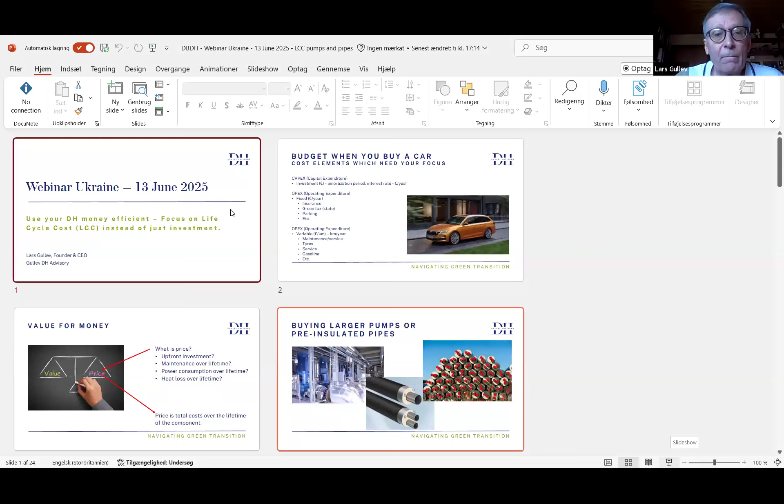Thank you very much for the invitation to this webinar, giving me the possibility to focus on what's important when you are in a situation to make new investments. I'll give you a picture of how we, in Denmark, in the company where I worked before, VEKS District Heating Company, responsible for district heating supply to the western part of Copenhagen, make decisions to invest in larger components like pumps, pre-insulated pipes, and boiler installations. So, use your district heating money efficiently. That's the title of this presentation, with focus on life cycle cost instead of just the upfront investments.

When you buy a car, you need money to give to the car dealer for buying the car. So you have CAPEX, capital expenditures. That means the investment you have in the car now, and this investment you have to depreciate over a period of some years, 6, 7, 8, 10 years. You have to take into account the interest rate. With these figures, the investment, the depreciation period, and the interest rate, you can calculate how many euros per year you need to budget for financing this car.

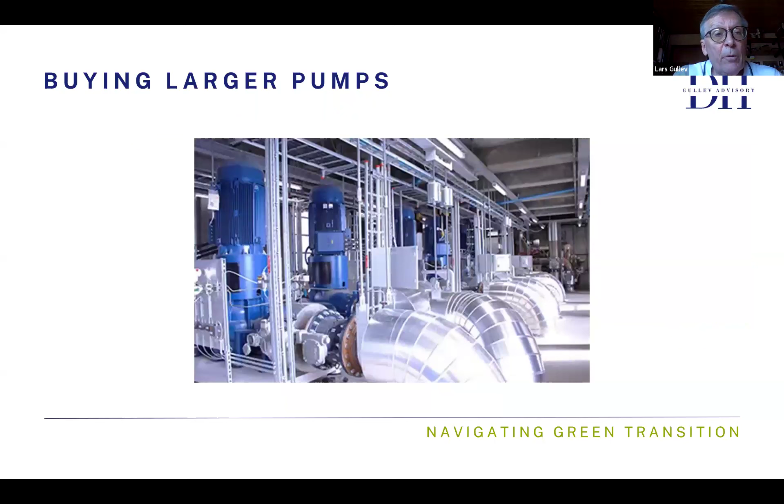If we start with the pumps, it's very important to focus on the necessity for the pump system to last for many years. For this, it's necessary to have reliable operation of the pumps, and therefore it's essential that you are very critical when you design the pump correctly from the start. If you have a poorly designed pump system, it will generate decades of high maintenance and poor reliability for the operators of the pump.

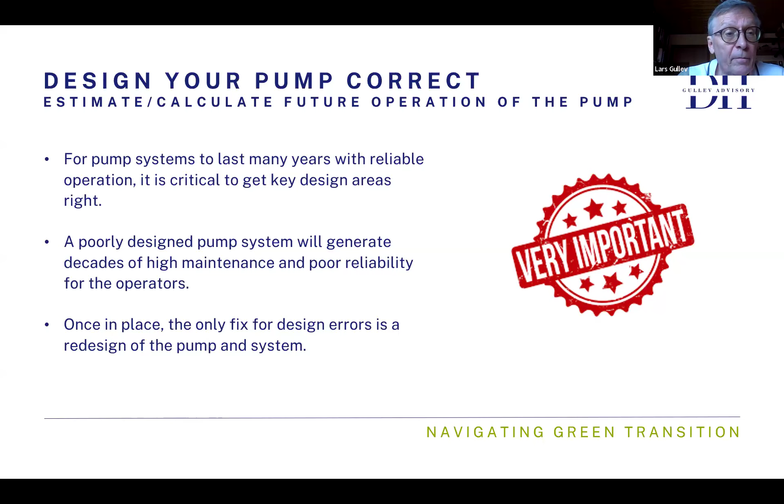But the most important point is that if you have designed a pump wrong and placed it in your system, the only way to fix that problem is to redesign the pump and the system, and that's a very expensive decision to make. When we look at how to design a pump correctly, it's necessary to go into details and try to estimate how the pump will be operated in your district heating system.

The situation could be that heat demand will increase over the years, so you have to take that into account when you design your pump, designing it for a larger flow in the coming years. It's also important to focus on whether you're installing a pump you could operate both summer and winter, or specific pumps for winter production of district heating and summer production of district heating.

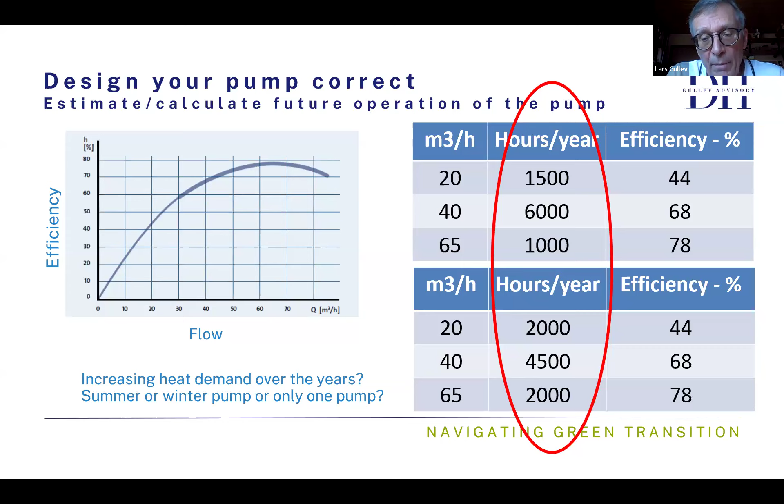I've tried to show on the slide that you have different demands for heat, and the amount of operation hours per year could be very different from one situation to another. That, together with the efficiency of the pump at different working points, means it's important that you design your pump correctly, taking into account how many hours per year it will operate in specific working points. If you don't make that calculation, it's more or less gambling whether you'll have success with the pump or not.

When you have bought the pump and put it into operation, the cost for having the pump is shown on this slide. It's just an example, and I've put in the source so you can find the figure on the internet. This is a picture of the total pumping costs, which can be estimated at $600 per kilowatt per year of power.

Of which up to 70% is electricity consumption. You can see for the smaller pumps, the percentage share of cost related to electricity consumption is smaller, but the total costs are larger. If we have a pump of 5,000 kilowatts or 5 megawatts, the primary cost for operating the pump is electricity cost, and that covers totally 85% of the annual cost. So it's evident that if you haven't designed your pump correctly, you will lose a lot of money because 85% of the total cost is related to the operation of the pump.

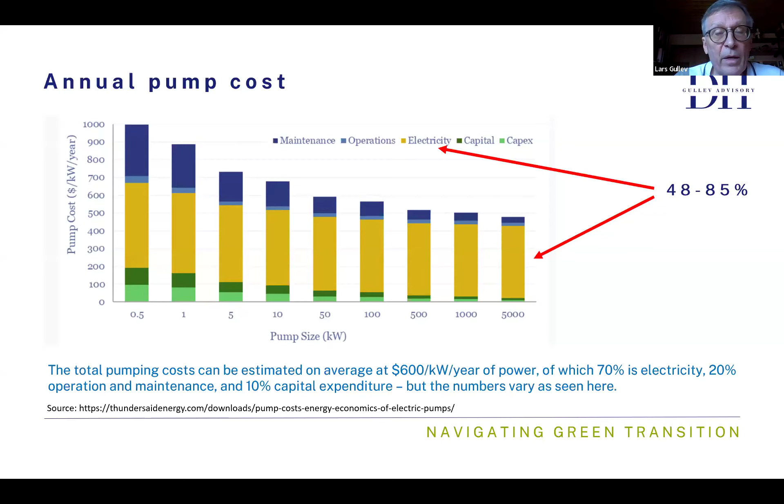There's a difference from around 50% for the smaller pumps up to 85% for the larger pumps. That's just to ensure you have that in mind when looking at the cost for having a pump.

When we call for tender for larger pumps, we give the supplier information about the head we need for the pump, the amount of meter water column it could operate with, and the flow. But we also focus on the efficiency of the pump. We put into the tender specific working points where we ask about the efficiency for the pump working in this operation point.

We also require in the tender that the efficiency of the pump at these specific operation points has to be confirmed during operation. That means after the pump has been in operation for some months, we measure the efficiency at these specific working points. If this criteria from the tender is not fulfilled, there will be a penalty for the supplier of the pump.

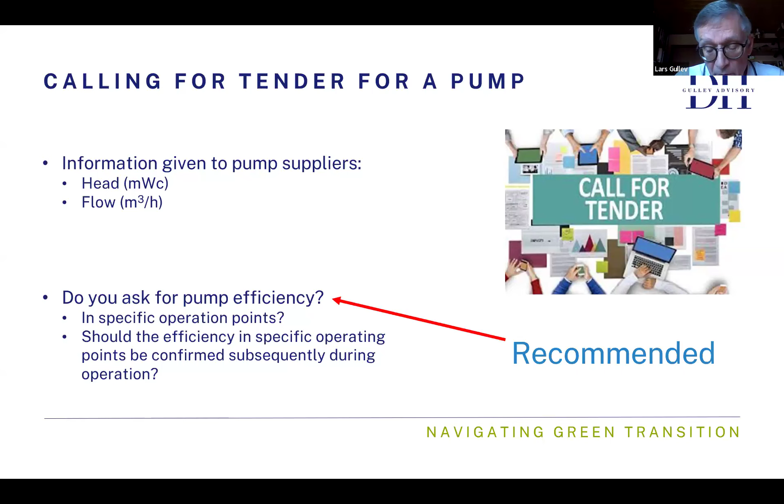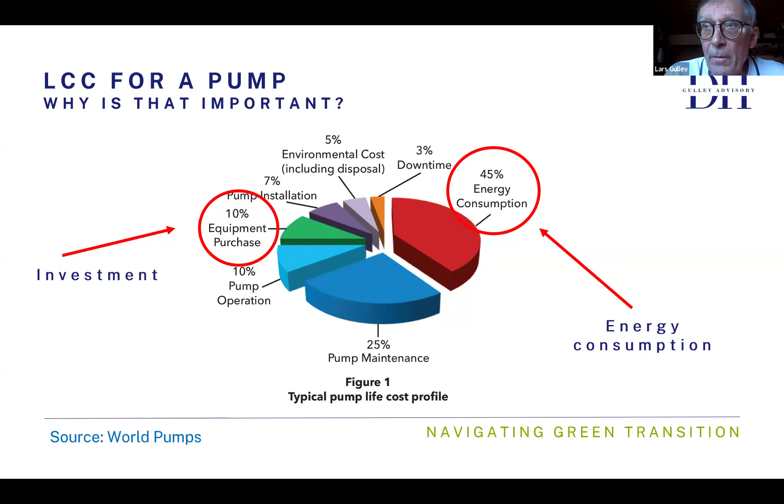So this picture shows it can be very expensive for you if you save a little money when you buy the pump, if the consequence is that electricity consumption during the lifetime of the pump is much larger. So it can be very expensive to try to save money when making the primary investment in the pump.

When I talked about these efficiency curves and efficiency of the pumps, it's necessary when you get your tenders that you compare the different products from different producers of pumps, because the efficiency in specific operation points defined by you can differ from one producer to another.

That depends on how the curve for your flow in the system will look. Maybe here pump A is the best, maybe it's pump B. I can't tell you here because it depends on your actual operation situation and your system. But you have to look at these figures from the different potential suppliers of the pump to your system.

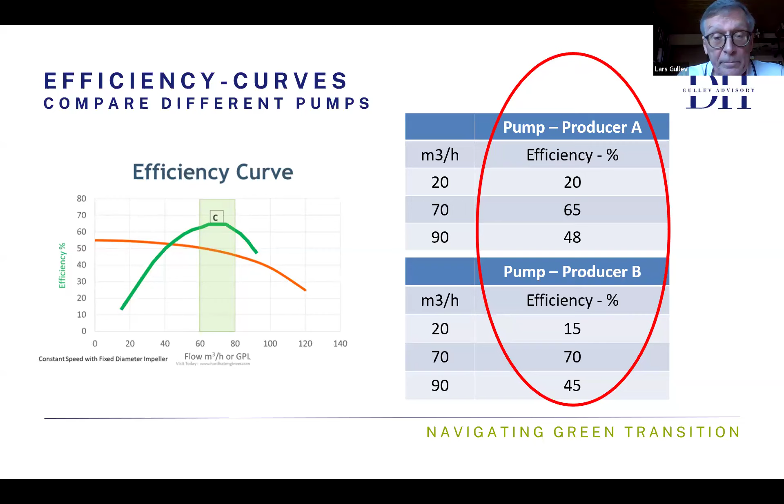Focus also on what we call the BEP, the best efficiency point. That's the point where you have the lowest energy consumption in the pump, or the best efficiency. And you have also to compare that from the different offers you get from the different producers.

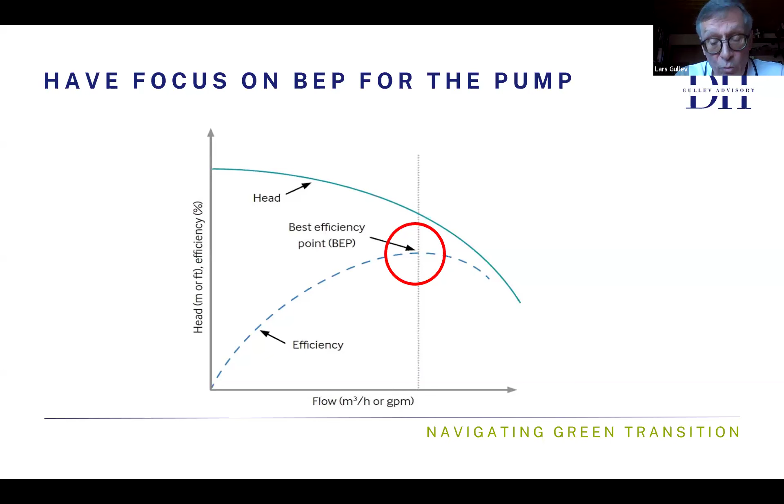When I focus on this life cycle cost, LCC, it's a concept which refers to the total cost of a product or service over its lifetime. When you look at that, you can be sure that you take into account both the upfront investments, the operation cost, the maintenance and repair cost, and how to get rid of the product again. Then you can compare products from different producers in a fair way, because it gives a picture where you can compare one product to another.

Furthermore, this life cycle cost analysis can help you to minimize your total cost and by that maximize your energy efficiency for many types of systems, including pumping systems, district heating pipe systems, and boilers.

So it's more or less the same method you use when you compare different cash flows from different projects, where you use the net present value way to calculate which product is most favorable.

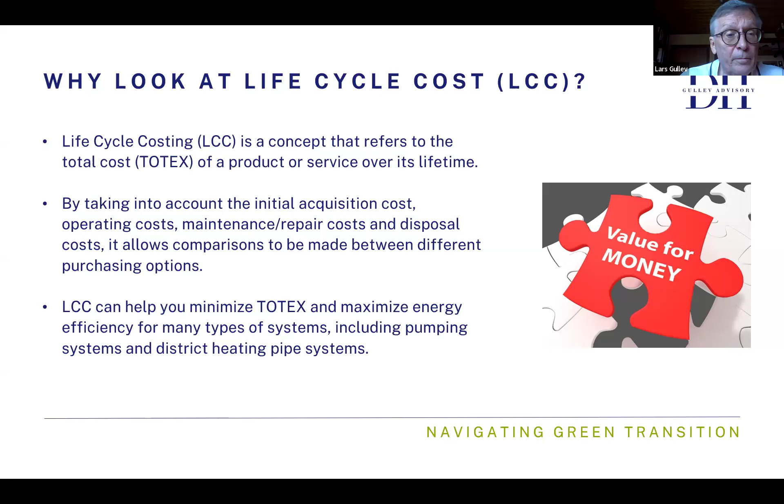So my recommendation for the content of your tender documents is, of course, you ask for the price of the pump. If possible, you could also ask for the price of a maintenance agreement if you are interested in such one, and if it's offered by the suppliers of the pump.

Then you ask for the pump efficiency at specific operation points, and you inform that it's necessary that this efficiency at specific operation points is demonstrated and verified after the commissioning of the pump.

And then you try to calculate how you should be compensated if the required efficiency of the pump cannot be demonstrated or cannot be verified. So the correct design and high efficiency of the pump at the normal operation points are much more important than the here-and-now investment in the pump.

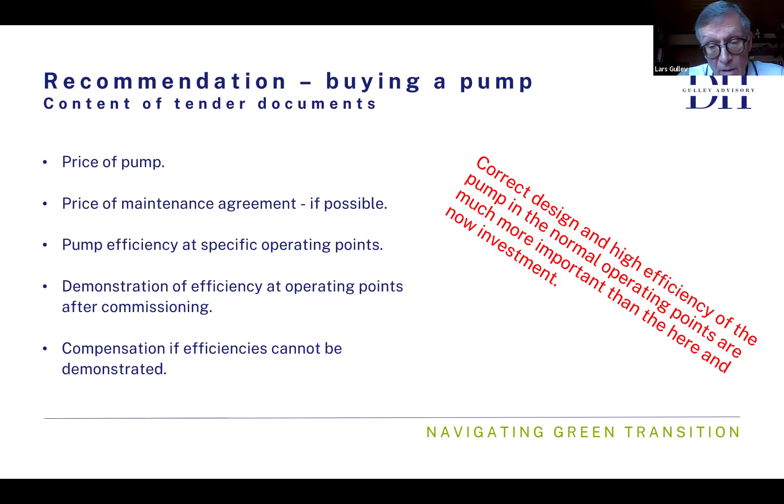Then we jump to the pre-insulated pipes. I don't know if it's easier to make the same calculations here, because there are more parameters you have to take into account.

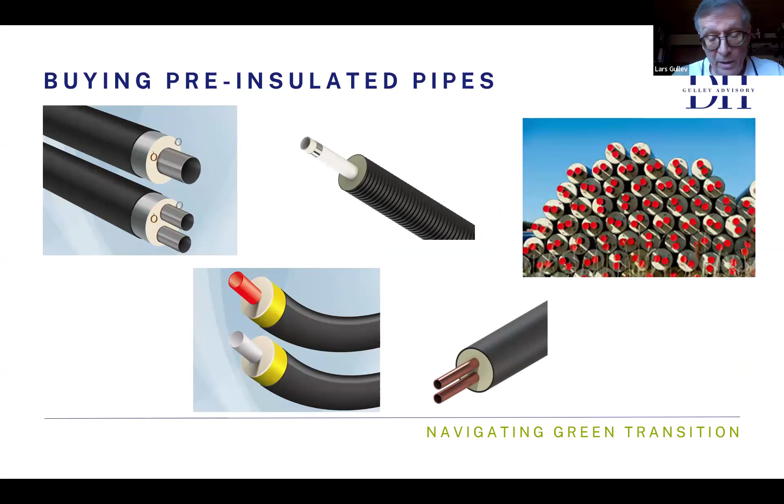You can buy the pre-insulated pipes in different series, series 1, 2, or 3, and the series number reflects the thickness of the insulation. That means that a series 2 pipe is better insulated than a series 1, and series 3 is better than series 2.

I have just put a red circle around some of the figures, so you can see for this dimension of 300 millimeters, a series 1, the heat losses are around 41 watts per meter; series 2, 33 watts per meter; and series 3, 27 watts per meter. So decreasing heat losses if you go from series 1 to 2 or to 3.

So you will save money in your operation phase by having lower heat losses, but at the same time you increase your investment now, because it's more expensive to buy series 2 compared to series 1, and series 3 compared to series 2. So here again, you can reduce your operation costs by increasing your capital costs. What to do depends on different figures I'll come back to.

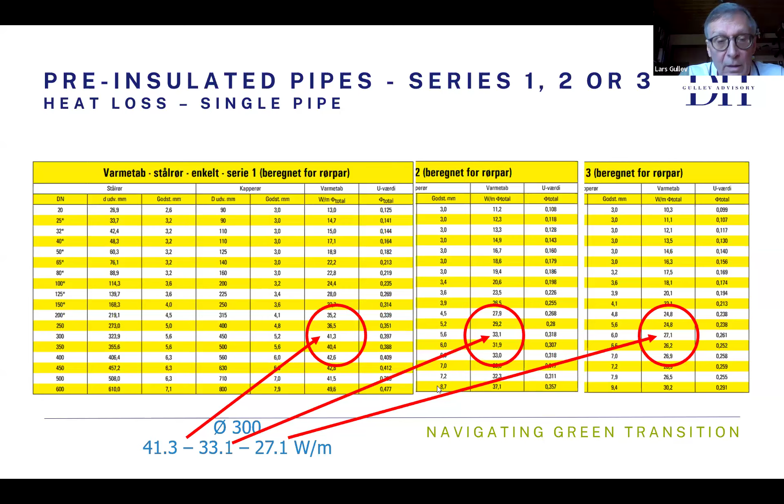You also have to decide if you will buy this pre-insulated pipe as a single pipe or a twin pipe. This is just an example for series 1. A single pipe has one pipe for flow and one for return. In a twin pipe, you have flow and return pipe in the same outer casing.

Here again you can see that if you choose the conventional way with two separate pipes, the heat loss for a 125 diameter pipe is 28 watts per meter, and it's almost half if you choose a twin pipe. So here again you can reduce your operation cost by investing more money when you're buying the pipes.

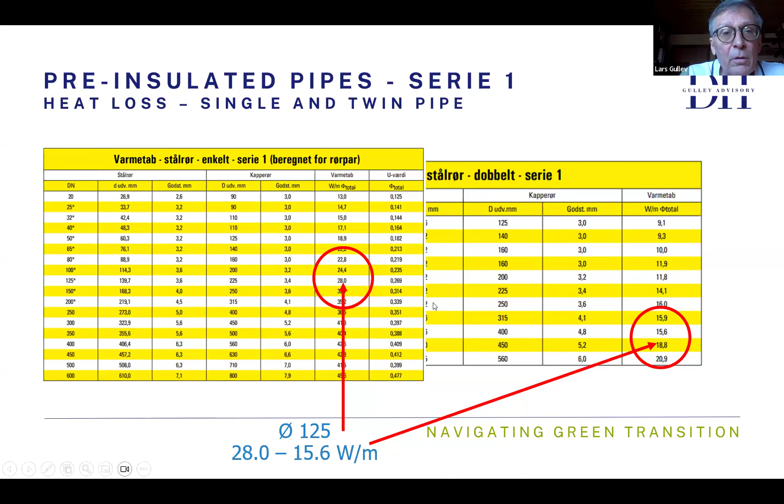What to do depends on what's the cost for the heat you send through your pipe system over the lifetime of the pipes. So the elements you have to take into account when you design your pipe system for minimizing the life cycle cost: do you want to choose a single pipe system or a double pipe system, and then you have to decide which series you want—1, 2, or 3.

When you have made this decision, or before you make it, you also have to take into account that it could be more expensive to construct the pipe system with two single pipes compared to a double pipe, because you have to make a wider ditch for the pipes.

Then you have the maintenance cost over the lifetime. You have to look at the maintenance cost for single pipes or double pipes. With single pipes, you have double the amount of joints, which could be necessary to maintain over the lifetime of the pipe system. You have fewer joints when operating with a double pipe system or twin pipe system.

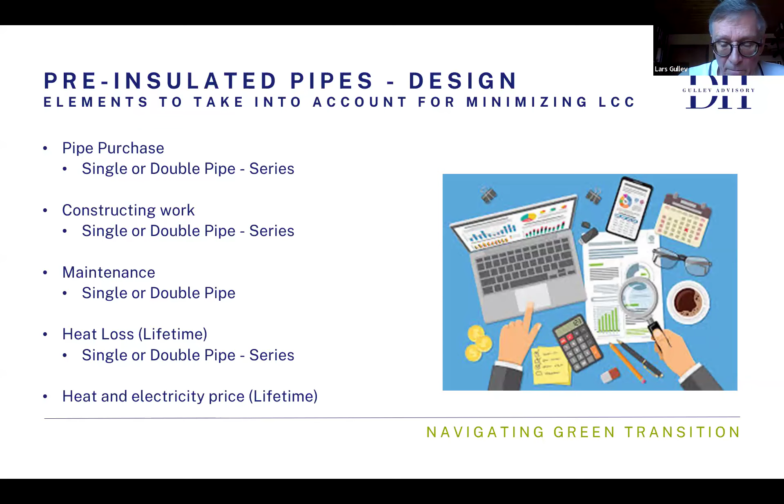A very important element when we look at the operation costs for this pipe system is the price for electricity and the price for the heat you will send through the pipe system. So you have to estimate how the price for the heat you buy and put into the system will develop over the next 20 years, for instance. It's not easy, but there is some help you can get.

The elements to take into account for minimizing the life cycle cost, as mentioned, are which insulation series you should choose, and whether it should be single or twin pipes. There are a lot of parameters here, so where can you find help?

There are some free tools on the internet from the producers of pre-insulated pipes where you can get help. There's one from the company Logstor, and you can just Google Logstor calculator. There you will find a free tool where you can put in your specific parameters for heat price, electricity price, and then see the consequences if you choose single pipe or double pipe, insulation series 1 or 2 or 3.

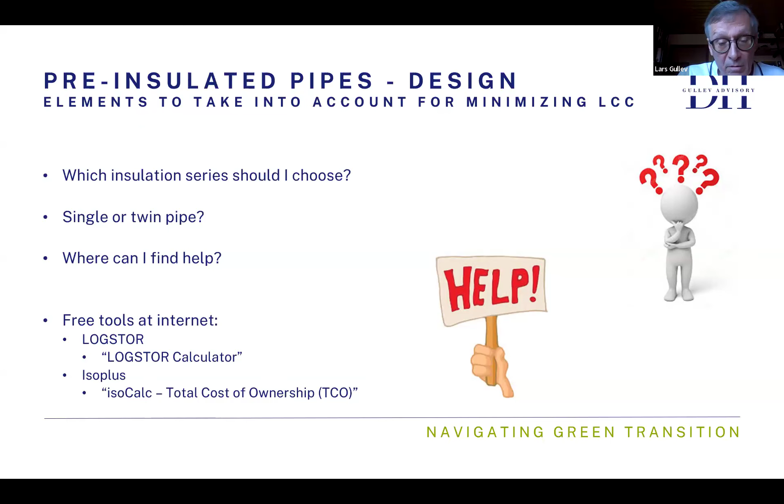And the same if you go to the ISOPlus website. There you can Google ISOCalc, and there you also have a free software tool you can use, the total cost of ownership. So it sounds complicated with these pipes, but there's good help you can get access to free on the internet.

When we then jump to a boiler, the boiler tender document should include, at least if I was responsible for it, the capacity of the boiler in megawatts, and also ask which kinds of biomass can be used in this boiler, or which kind of biomass you want to use, and also ask about the moisture content in the fuel - ask that question to the supplier of the boiler.

When I mention this type of biomass, the background is that it's probably necessary for you to have flexibility between different types of biomass. The situation on the biomass market can change over the next 20 years, meaning that right now you might use wood chips or straw.

Or maybe you will use products from sunflowers. But in the next 5 or 10 or 15 years, it could be other sorts of biomass which you wanted to use, and it is necessary that the boiler you have bought can also operate with these kinds of fuels. Then it's necessary to put focus on the efficiency.

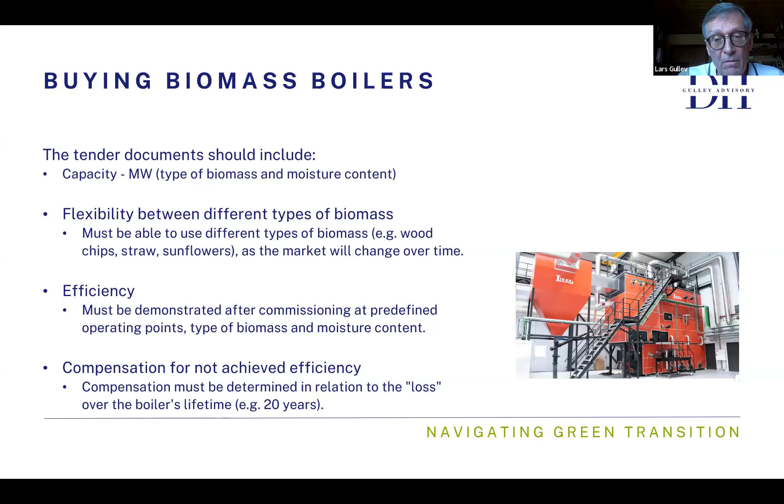To summarize, when buying a pump, the investment in the pump can be 5 to 10% of the total life cycle cost. The operation cost can be up to 85% of the total life cycle cost. That means the efficiency in the specific operation points for the pump is essential for the total economy in your district heating system. Therefore, it's relevant that you have a high focus on correct design and efficiency of the pump at relevant operation points, much more relevant than just putting focus on upfront investments in the pump.

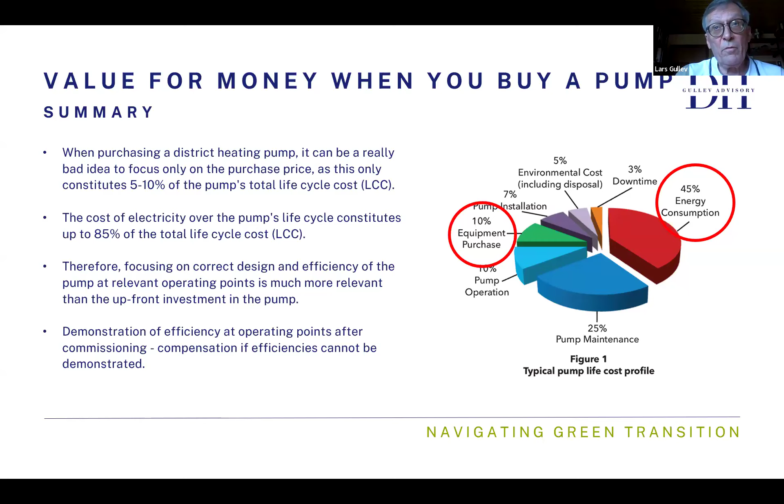And then again, the demonstration of the efficiency at the operation points after the commissioning, and a compensation if this efficiency cannot be demonstrated.

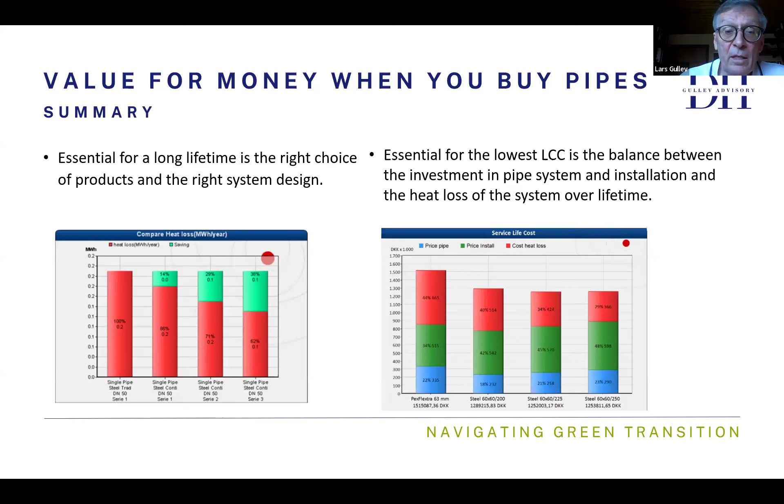For the pipes, it's essential for a long lifetime that you choose the right product from the beginning. That means you have focus on the heat losses in the system, and focus on the cost for the heat you put into the system over the lifetime of the system. It's essential for the lowest life cycle cost that there's a balance between investments in the pipe system and installations, and the heat losses of the systems over lifetime.

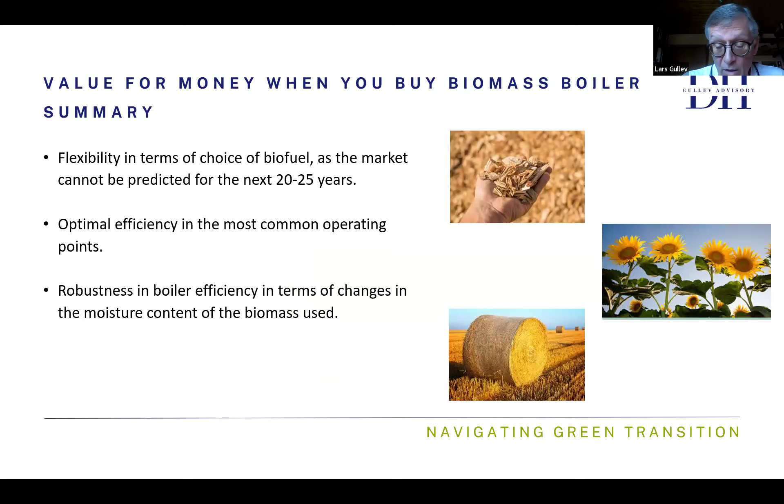So for the biomass boiler, flexibility in terms of choice of fuel is important, because the market cannot be predicted for the next 20 to 25 years, and optimal efficiency in the most common operation points, and then robustness in boiler efficiency in terms of change in the moisture contents of the biomass used. So that was a very quick introduction to life cycle costs. Thank you very much.

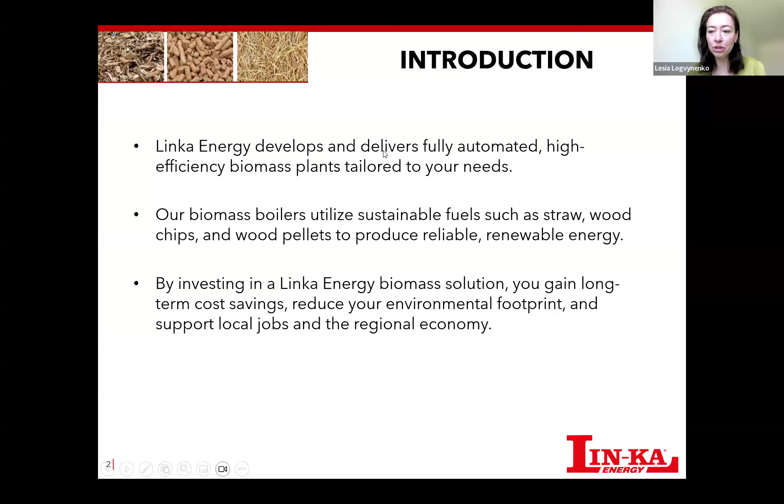Oh, I'm here. Just need to unmute. Thank you for having me here. I'm very pleased to see so many, but it just shows the need for and the interest for all this that we have to supply.

I'm gonna tell a little about biomass boilers. Lars made a good presentation about some of the important things to ask for in the tender materials, and he's completely right in what he's saying. We have made biomass boilers for the last almost 50 years, and we know how to do it. We are very good at burning straw, which is quite difficult, and some of the fuel that you have a lot of in Ukraine. So I think that's why we have such big focus on the country right now.

Our boilers, our quality, and everything else. And as Lars mentioned, it's important to look into these things. You can easily buy a cheap boiler, but then it probably lasts 5 to 8 years if you burn straw. So it's important to look at the quality when you buy things like this, that you buy something that can last the 20 years or more. Otherwise, it can be a very expensive decision to do.

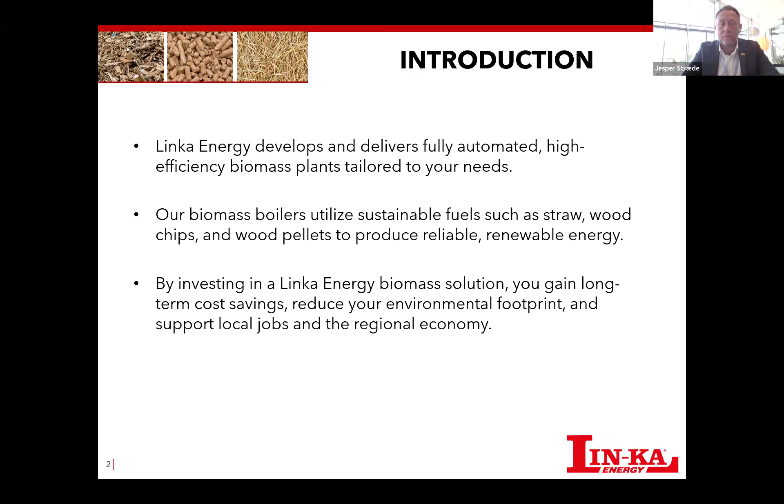Biomass is a lot of things. When I talk about biomass and when I talk to people around the world about biomass, then they always think that it's only wood chips, and that's not the case. We can burn all kinds of biomass, and I'll come back to that later. But biomass in essence is a matter of taking something that contains CO2 and getting something out of the CO2. So if you leave wood chips in the forest, then it will let out the CO2 that it gathered when it grew. So why not harvest the CO2 to do something? You can actually also collect the CO2 afterwards, but it makes sense to use the CO2 that's there already. If you use gas, for example, then you take up something that's in the ground, the CO2 is in the gas in the ground, and you take it up and you burn it and you let out CO2.

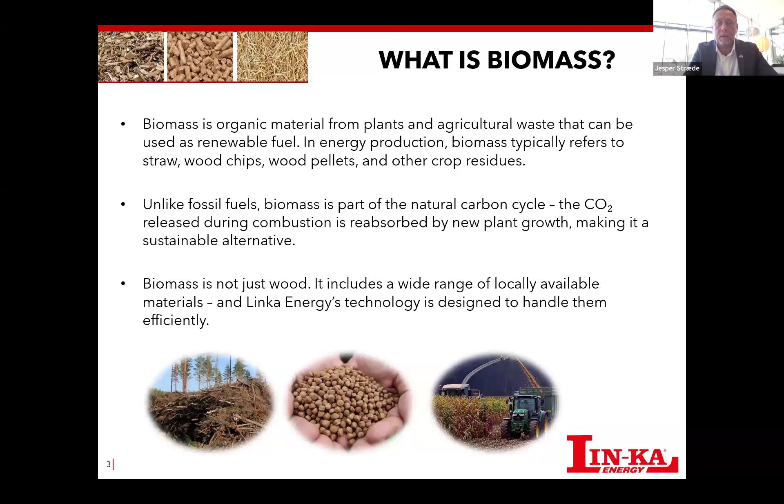That's not very green. Biomass is using CO2 that's already there and will be let out into the atmosphere if you don't either pick it up by burning it or using it in biogas, for example. Again, compared to some of the other things there are on the market when it comes to biomass, it's an easy way to pick a good heat source.

There is biomass all around us. It's just a matter of finding the right one. But when you use biomass, the benefit is that you have energy no matter how the weather is. If you use wind or solar, which is a very good solution, then you are depending on the weather. And I know that the weather can change in Ukraine as well as it can in the rest of the world, especially here in Denmark. We have a lot of windmills and a lot of solar panels, but we also have a lot of days where it's completely gray and cloudy and no wind, and then we don't have any energy.

So it's a good idea to mix the things. It doesn't have to be one thing. It doesn't have to be only biomass. It can be biomass and wind, biomass or solar panels. It actually works completely good together. Biomass also works very good together with a heat pump. So there are many things where you can put a good solution together without only choosing one.

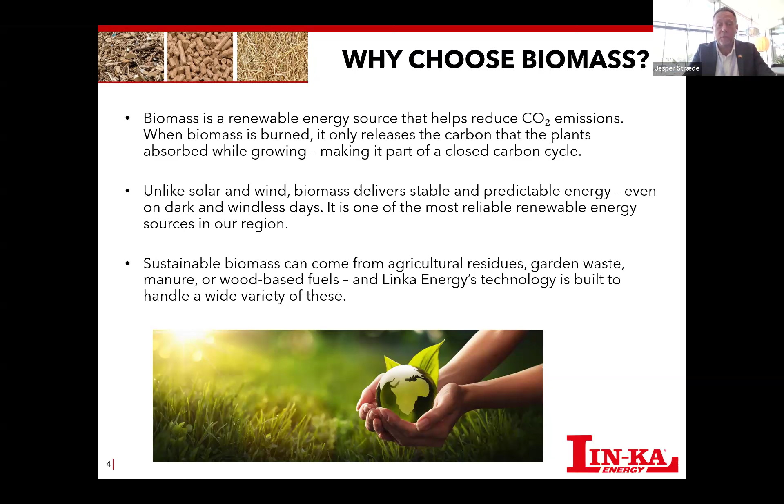So again, back to what's biomass. Biomass can be a lot of things. Again, usually it's wood chips, but it can be straw, it can be cherry stones, olive stones. You have a lot of sunflower husk in Ukraine. In Japan, we burn rice husk. So the most important thing is to look at what's nearby. You're not supposed to transport it a long way. It should be something that's in the near surroundings.

We can make boilers where you can mix fuels, using two types at once, but we can also use just one. If you build a boiler on wood chip and five years later decide you want to burn straw instead, it's quite easy to redo the boiler so it can burn something else, even if you didn't plan for it from the start. Of course, the more fuels you mix, the higher the price, because there are things you have to add to the boiler system. But it's easy to change to another fuel in most cases.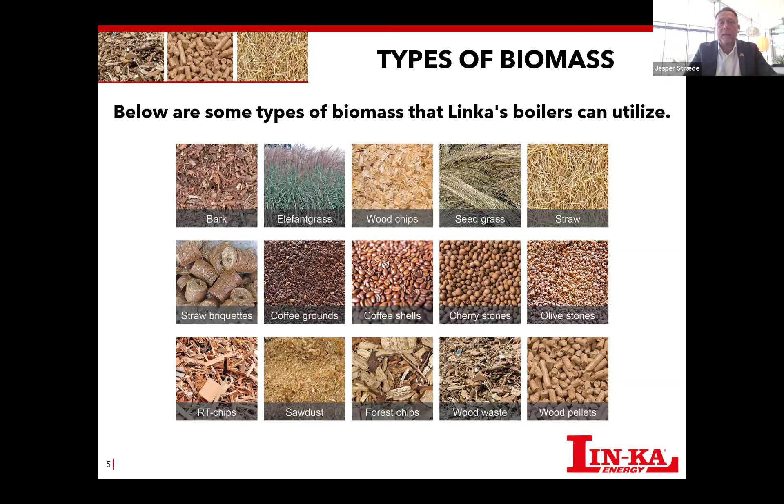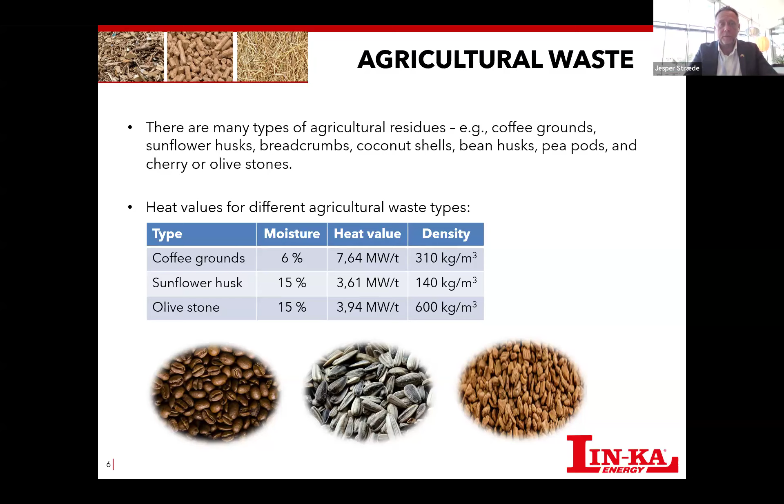Here's an example of the efficiency of different kinds of fuels. You'd be surprised how many things we try to burn. We have a test facility in Denmark, here in Linka. So if you have anything from waste, from some industry, agriculture, or something like that, we can test it. We can see how efficient it is, how the emissions are, and so on. It's surprising how many types of biomass you can actually burn.

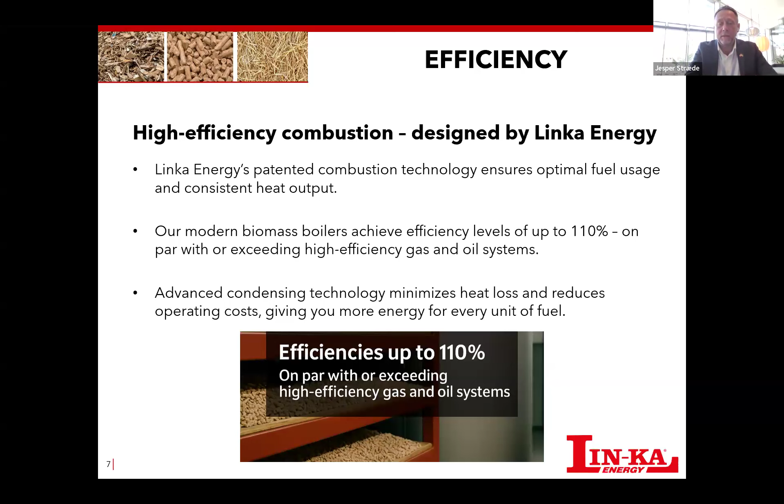There's this thing about efficiency when it comes to biomass boilers. A lot of people think they're not as efficient as gas and heat pumps, but it depends on the moisture in the fuel, and of course the type of fuel, pressure, and so on. But you can actually get a biomass boiler up to 110% efficiency if you use the right system. So there's no excuse when it comes to efficiency, because it's at least as efficient as the other things. I made a comparison here on the average numbers.

If you look at your country right now, gas boilers are a cheap solution to buy and cheap to use, because there's some limitation on gas prices, but you probably won't have that in a year or two. Then prices will likely go to market rates, and it can become a very expensive thing to have a gas boiler. We've seen that in Europe the last couple of years.

When it comes to electricity, electric heating is absolutely green if the electricity comes from a green source. But again, electricity prices can vary a lot. It also requires that the grid is ready for a heat pump, for example. That requires a lot, and it can be very expensive to build that part too.

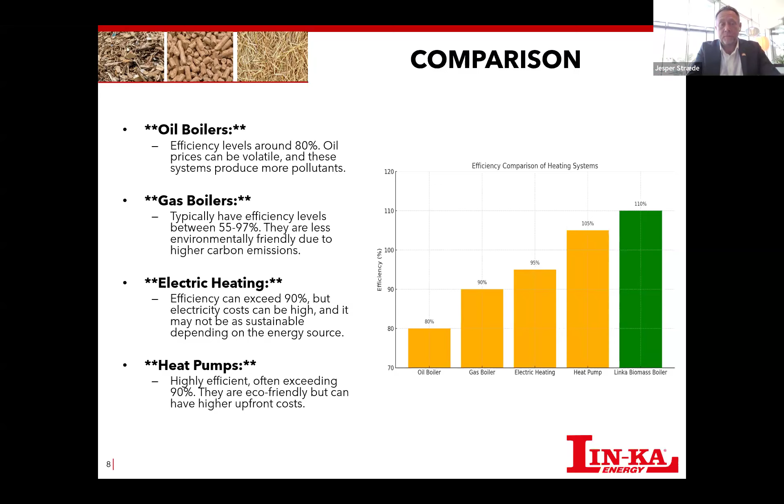When it comes to the future, we also have to look at how easy things are to operate, how many employees should be there, and so on. It doesn't require a lot to have a biomass boiler. I know there are regulations in Ukraine requiring a person always present at a boiler system, but here in Denmark, for example, most places with district heating, the biomass boiler can run for 72 hours without anyone present. Everything is controlled by phone or iPad, and it's completely easy to operate with very low downtime.

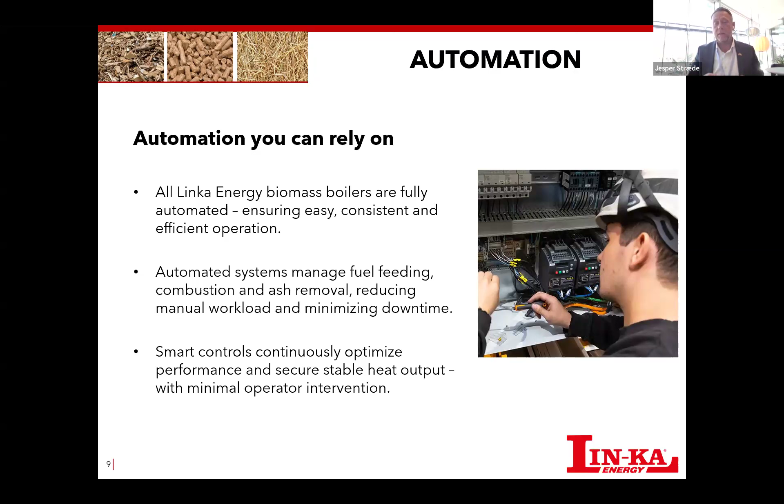So there are a lot of good reasons to invest in biomass. One thing is, of course, all the environmental aspects, the carbon footprint and so on. We've seen during the last energy crisis here in Europe that biomass prices were more steady than gas and electricity. The district heating companies here in Denmark who had biomass boilers were very happy, because they had a much lower cost on heat compared to the others.

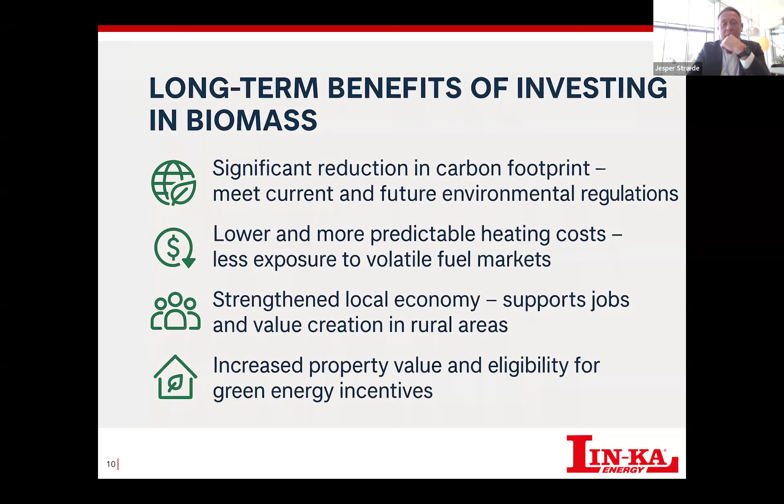Another benefit is that you keep the economy in the local area. When you pick up straw from the field or wood chip from the forest, it's local workforce doing it, and the money stays in the local area, which is good for most places. It creates jobs, and it's a very good way to keep money local. Also, it's easier to get people to live near a green district heating plant than, for example, a coal or gas boiler.

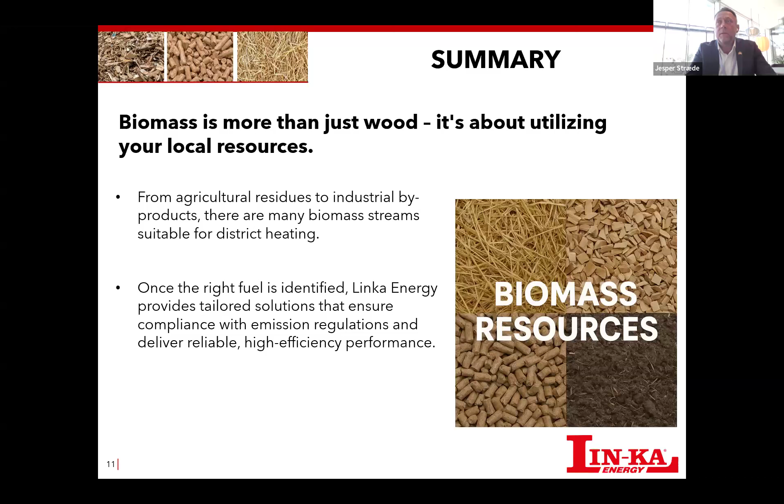Again, it's a matter of looking at what's nearby, and I'm frequently in Ukraine, and I would love to come by if you have any requests, and tell you more about how it is, and look at your local area and see what kind of solution we can make for you.

It's a tailor-made solution for every part. We don't have a fixed solution, and not many of the boiler suppliers have that, because you have to look at the individual case and the biomass that's nearby, and the need and the pressure and the temperature and everything else. There's a lot to take into consideration.

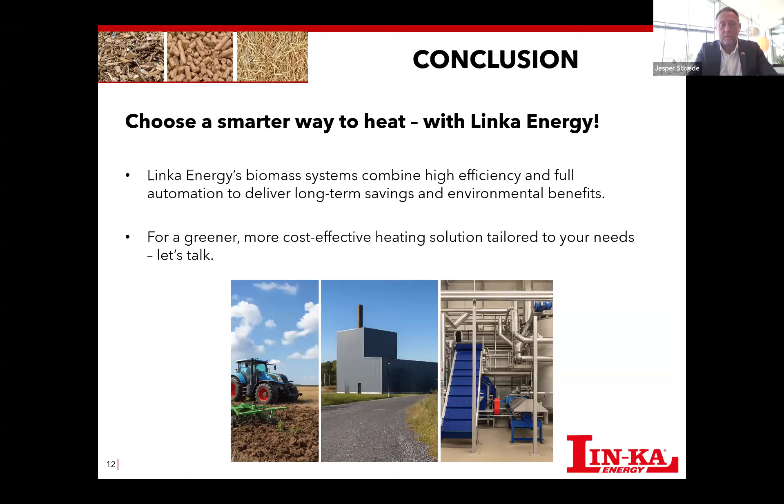So the best thing is to have an on-site meeting, and I'm ready to come and see if you need anything. I have my contact information here, and I'm sure Lesja will share the slides afterwards. But that was my presentation. Thank you.

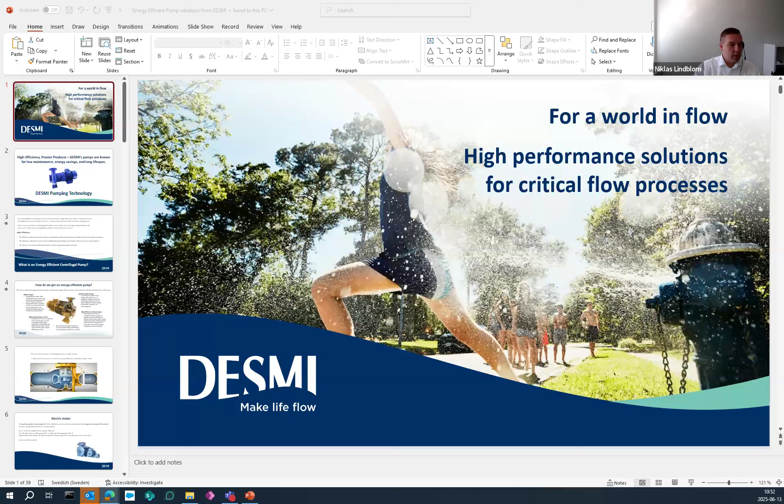Now you're seeing my screen, I think. So yes, my name is Niklas and I'm representing DESMI. We're a Danish pump manufacturer. And then we're talking about high efficiency pumps, to save energy and then save money. So then, how will we do that?

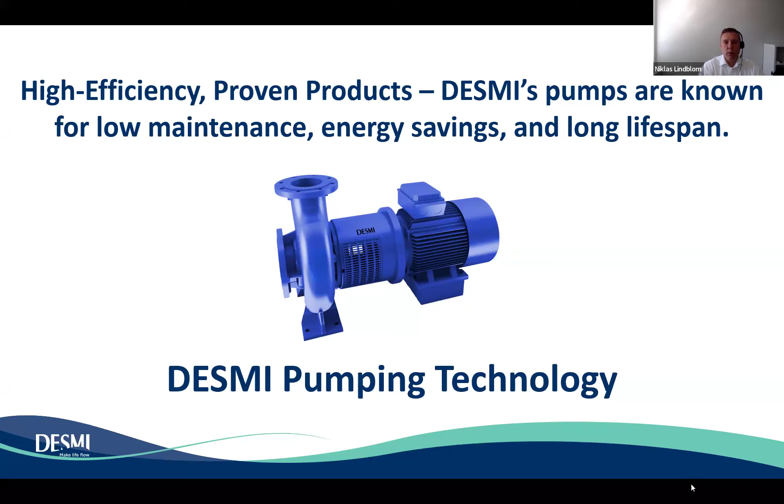So what is an energy efficient centrifugal pump? An energy efficient centrifugal pump is characterized by minimizing energy losses in the pump. The features of that are a good design, well designed for the casing, impeller, and everything, bearing, seals. So energy efficiency indicates how much energy is converted to usable power in relation to energy consumption. So that's about losses in the pump.

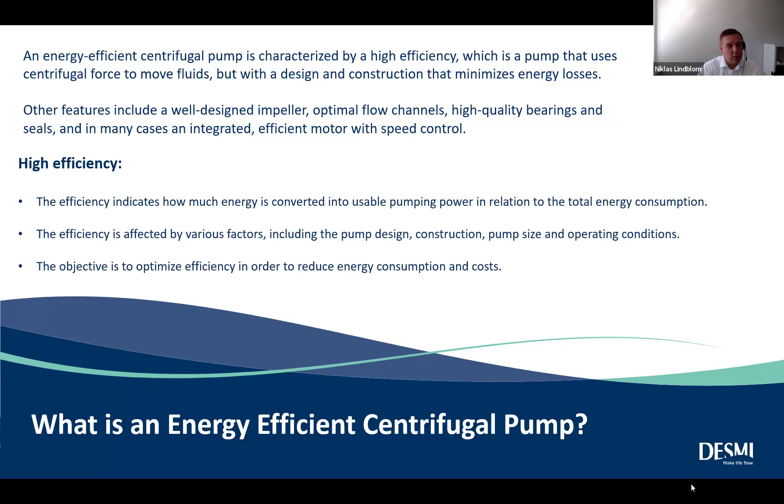And how do we get an energy efficient pump? We can start with a hydraulic design. We're talking about casing and things like that, to minimize the losses in the casing. We have some special casting for the pump casings, so the surface will be as smooth as possible, so the media can run through the pump much easier.

We need to design the impeller and optimize that for the duty point, so we can have the best energy efficient duty point for your demands. And use high quality bearings and mechanical seals, also important, because we need to decrease the friction for all rotating parts in the centrifugal pump.

And use energy efficient motors. It's a must today. All motors, and the new motor standards, will be more and more better. And if this is not enough, we can special coat inside the motor and inside the casing and also the pump. Then we increase the efficiency about 3 to 5% more.

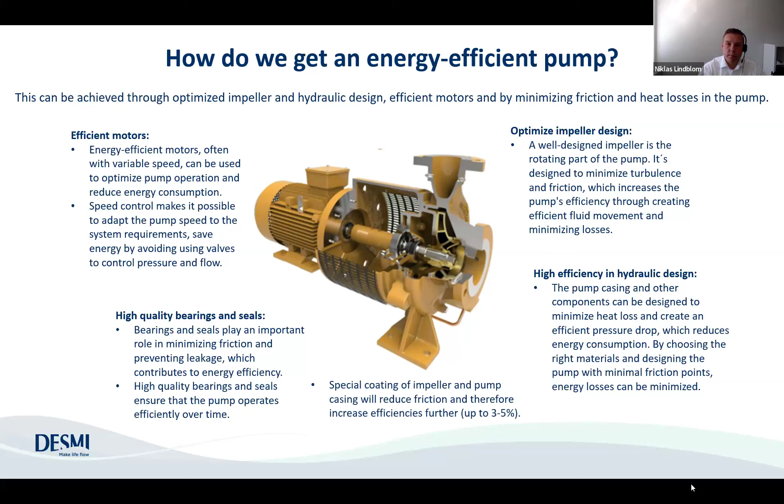We're talking about centrifugal pumps. The single suction is most common, but if we have higher flows, we always use double suction pumps. Then we increase the energy efficiency also, because we need to get the liquid from 2 ways in the impeller instead of 1 way.

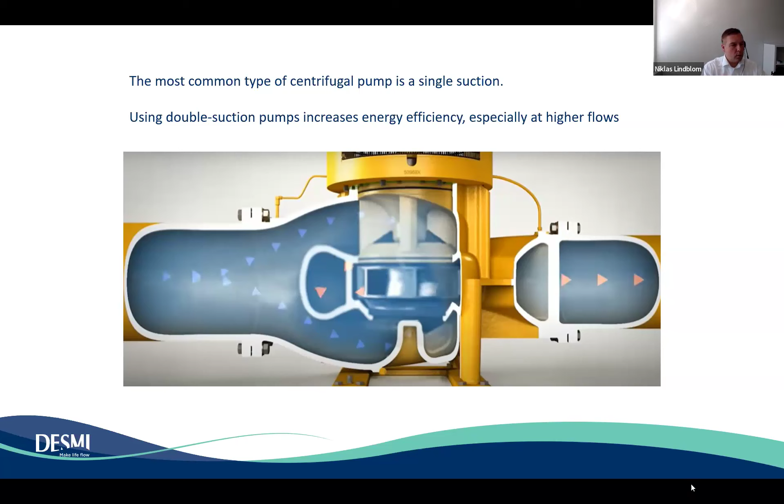As mentioned before, the electric motors are important. When you purchase an electric motor, the purchase is just about 3%, and 97% is energy losses. So if you compare an IE3 motor and an IE4 motor, there's in general about a 20% difference in losses between these 2 motor standards. And these days we also have IE5, and knocking on the door is IE6 also, in the markets.

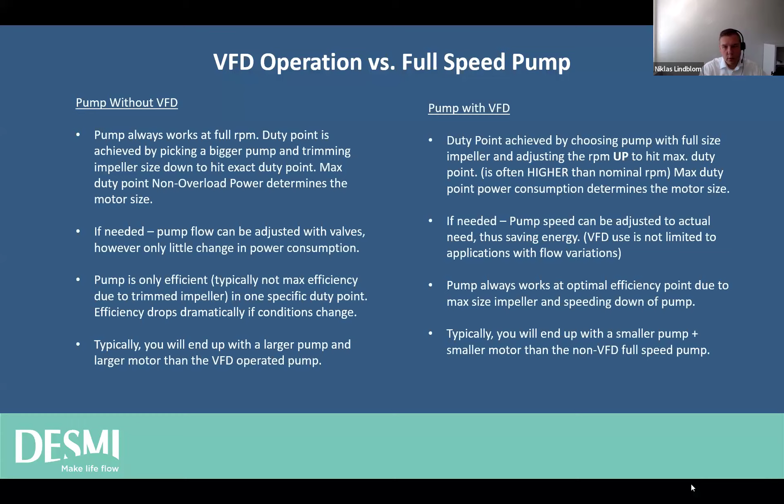And when we run a centrifugal pump, we always try to use VFD also. Why? If you don't have the frequency drive, you always run the pump at full speed, and you can just adjust the flow with valves. And the pump is just energy efficient at 1 duty point. Compared with that, when you're using frequency drives, you can have the whole full size impeller and work over the full range of the pump.

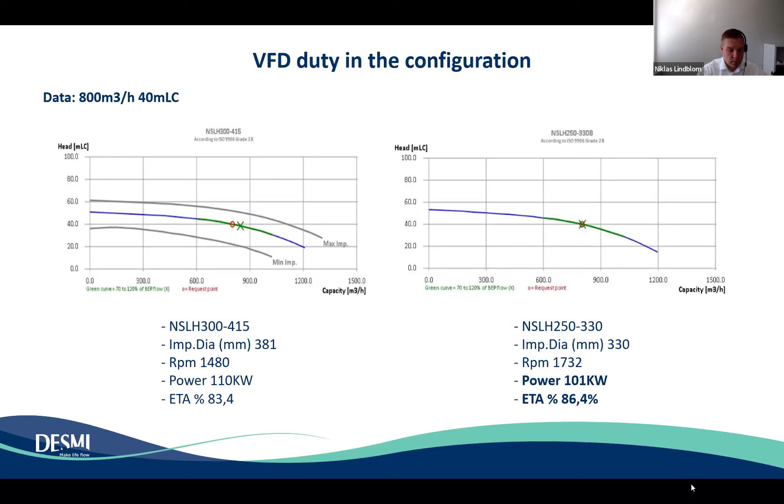And we're saving about 3% of the total energy losses in the pump. And then we can also add a pressure transmitter or flow meter, so we can measure that the pump runs correctly in your systems. So then we don't need to run it at the wrong duty point, and instead we can use the needs from the customer's network.

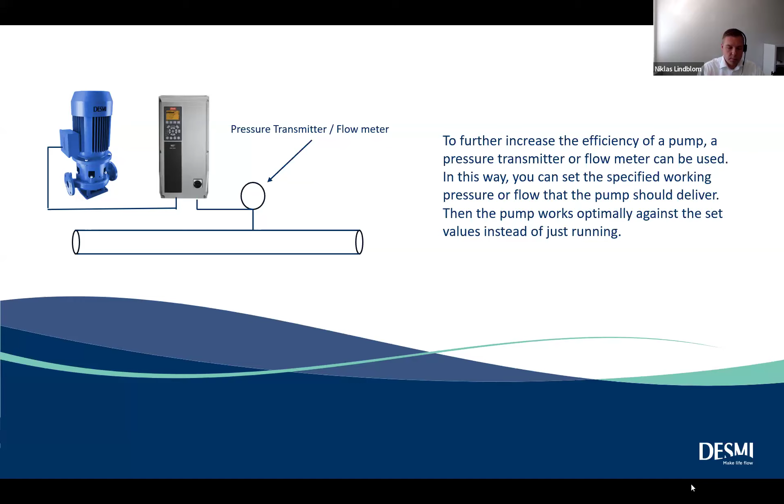So why is high energy efficiency important? Operating cost - energy efficient pumps have reduced power consumption. And we have environmental aspects also. We are saving the environment.

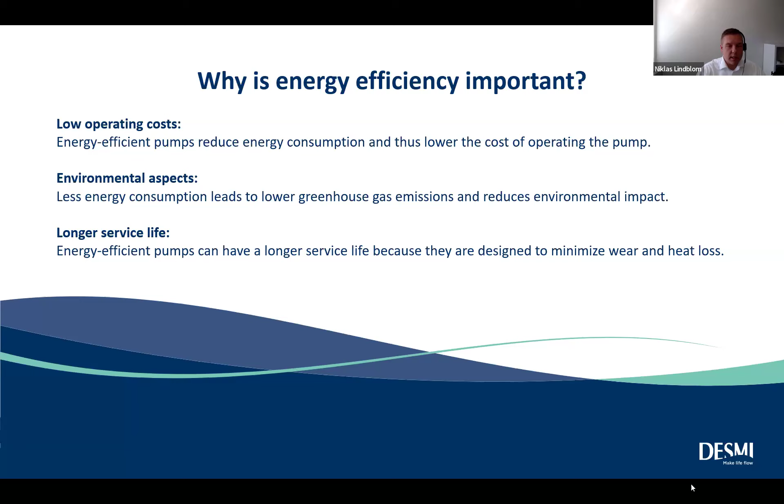A better designed pump has a longer lifetime. This is a little bit more general than Lars shows. So when we're looking for a pump for a lifetime of 15 to 20 years, the initial cost is about 10%, including installation. The maintenance is about 5% of the total cost, and the energy cost is 85% of the total for the pump.

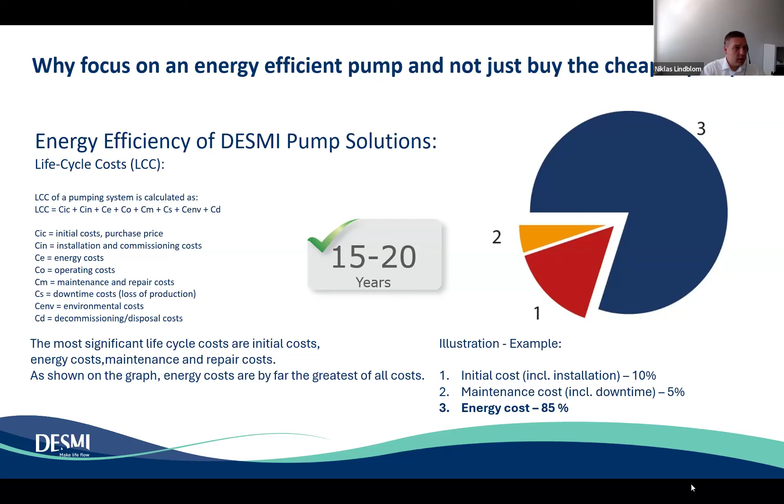We have a study we made in Ukraine about replacement pumps. The total investment for the pump is 527,000 euros. But to achieve the energy savings, the payoff for this pump replacement is just 2 years. Then the company is just saving money by changing this.

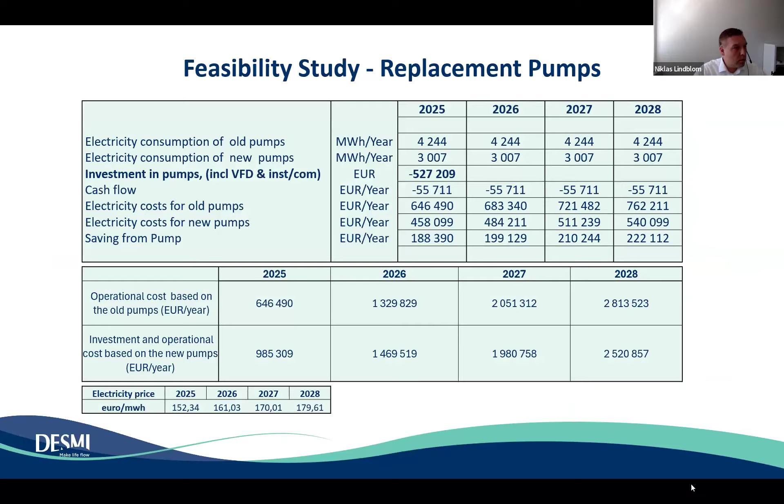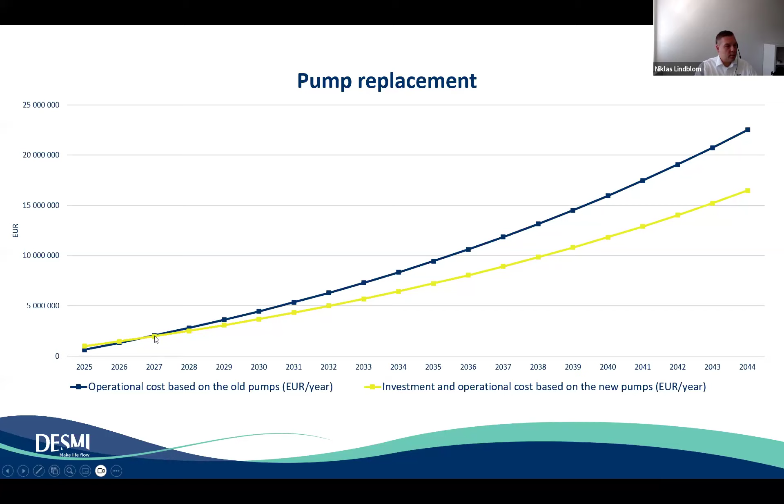Here in the graph it's a little bit more, you can see it much better. The installation cost in years 25 and 27 is plus minus null. Then you're saving money all the way.

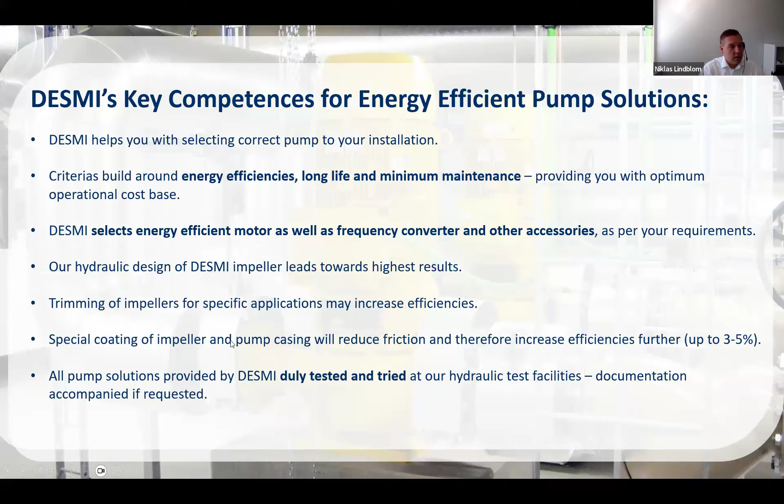So that's our key competence for energy pump solutions. We always try to give you the most energy efficient pump for your demands. And we can help you and give you suggestions to do things another way if you have issues. So we always try to help you.

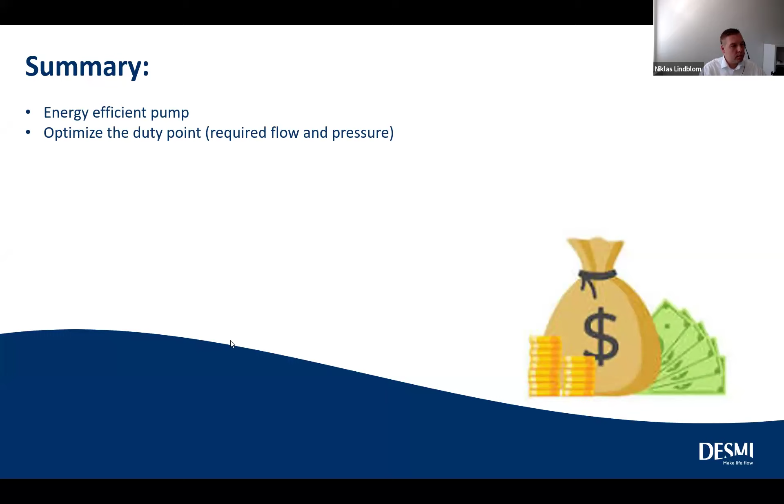So if we summarize this a little bit: to get the best solution for you, choose an energy efficient pump as possible. Optimize the duty point, as Lars also mentioned, that's where you have most of your running hours. Choose correct electric motors; we use VFD together with a pressure transmitter. If you use this, it's a little bit higher initial cost maybe to invest in, but you're saving a lot of energy and saving money.

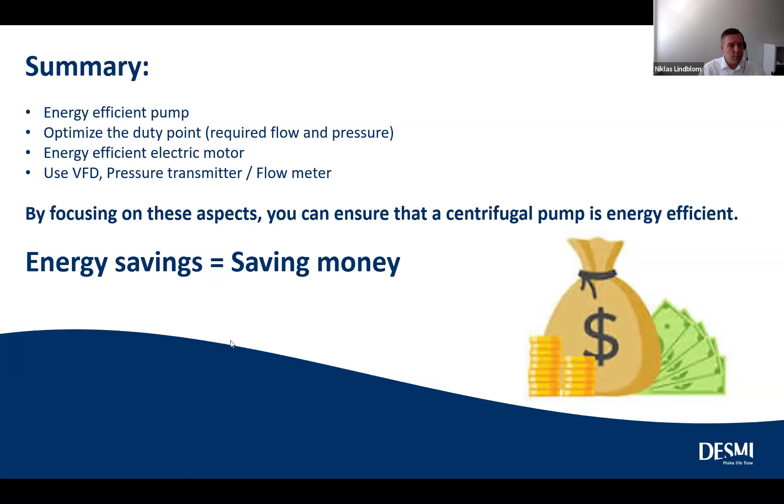So thank you for me.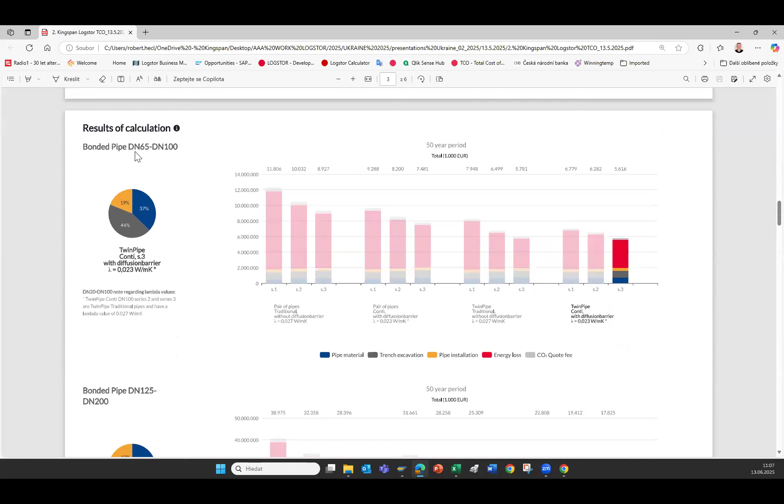I will first show the group of DN65 till DN100. Second group is DN125 to DN200 for the medium. Next part is DN250 to DN500, and we do not have bigger dimensions there. So I will show you the result for the biggest one, DN250 to DN500.

As Lars said, you have the possibilities to choose what kind of insulation, what kind of pipe is best for your project. I've been in the business for some years, and I know the most focus is always placed in the quotation on the price of the pipes.

But if you see, the price of pipe is that very small blue part of the column. And if we talk about the price of pipe, you see the size of the blue bar is very small and very similar.

But you may see the result while using typical pre-insulated pipes in first class insulation. We may talk about the total cost of ownership for 50 years being 129.2 million euro.

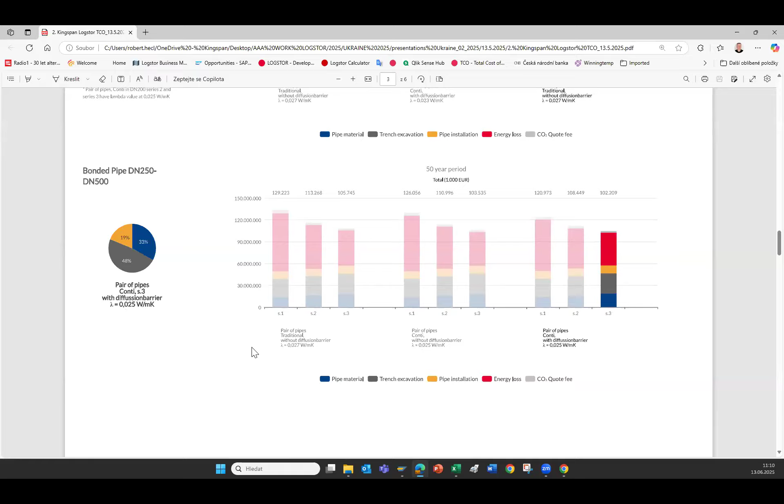By saving CO2, this is the general issue about saving CO2 till 2030 or 2050 to be CO2 neutral, so for the ownership of the pipeline it is very important.

I don't want to be too detailed in the presentation, but for you it's best to remember to find the contact to Robert Hecl from Logstor, then I will advise you how to use the free tool on our web pages, or I will do the calculation for your project.

That's all from me, thank you very much. Hopefully I'm in time, and I will stay for future questions. Thank you very much.

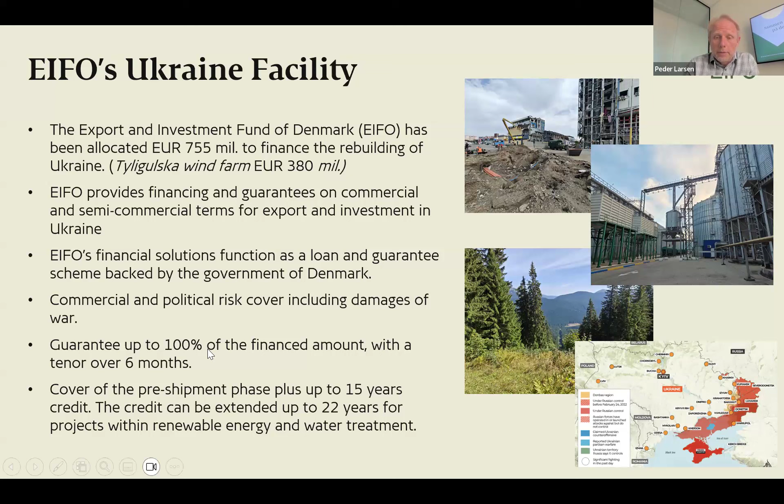We can give cover up to 15 years for district heating, which means that will smoothen out the investment for larger projects. You are able to get a repayment debt up to 15 years, and I think that's good to know when you have to look into the cash flow calculations.

For Ukraine, we have two programs. We're working with the public sector and with private companies. I would say the biggest difference between these two programs is that for projects in the public sector, we are able to offer a grant of 40%, and that's quite a huge amount. Basically, if you are to borrow 10 million euros, and we decide it's a project we can support and we have funding,

then you could receive up to 40% grant for the individual project, as we have spoken about earlier today. For private companies, I would say we work on a completely normal basis. We have decided to work full scale in Ukraine. So there's not a grant possibility, but we will provide loans and guarantees as we do in any other countries around the world.

The only thing I would like to say is that our financing, both for public and private companies, is in the high end due to the high risk in Ukraine at the moment. On the other hand, we also think that we have seen that we actually are attractive for a lot of clients in Ukraine.

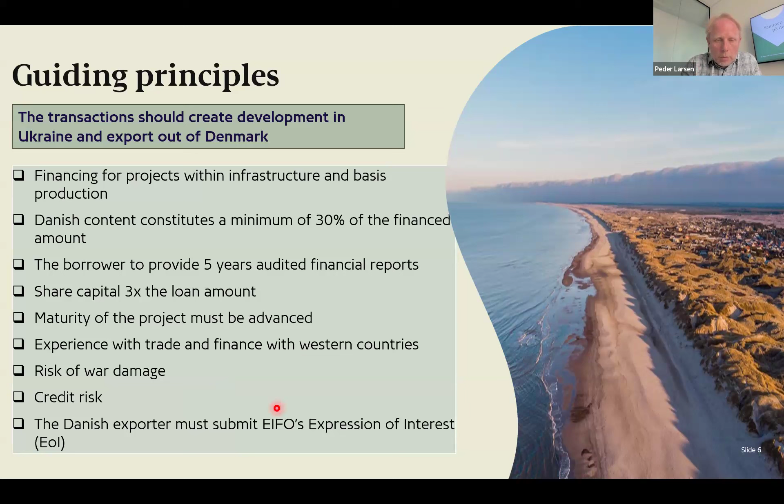How to work with EIFO? First, find a Danish exporter or supplier of goods, and once you've found a supplier you'd like to work with, submit an expression of interest to us. We have this on our homepage, and Lesia will forward my presentation later. There's a link here—if you click on it, you'll get to our dedicated homepage for the Ukraine facility, where you'll find the expression of interest.

Before you go to this, it's a small scheme. It's just basic information needed for our screening committee to decide whether a project is within the scope of the Ukraine facility and whether they believe EIFO can work with it. If they decide based on this small application, it will be passed on to our credit analysis team, and they will take your project further from there.

Lesia, I could have gone on longer, but I know I was supposed to have finished 7 minutes ago, so I will stop now unless there are specific questions.

Thank you, Peder. I think there should be a lot of questions from the audience, but I don't know if we have time for that.